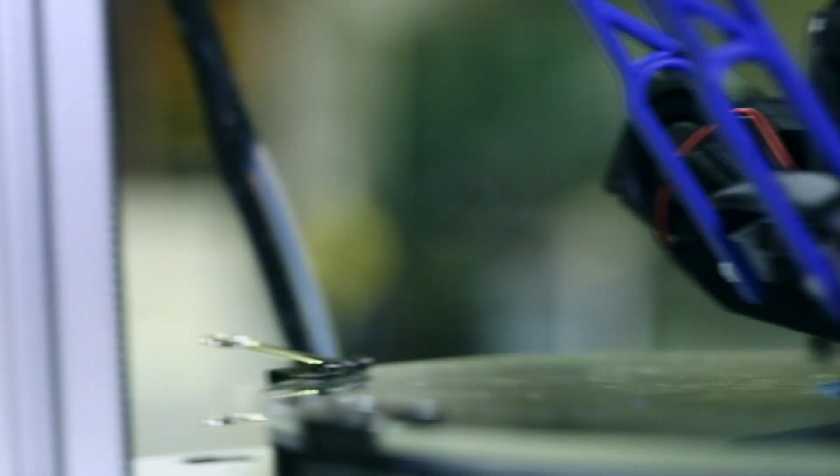How does a cross-trainer get your heart pumping and your legs burning? What allows a turnstile to let workers through but stop intruders in their tracks? How does a 3D printer create perfect replicas of the most intricate objects? To answer these mysteries, we dive deep inside these and other extraordinary machines to reveal the secrets of how things work.

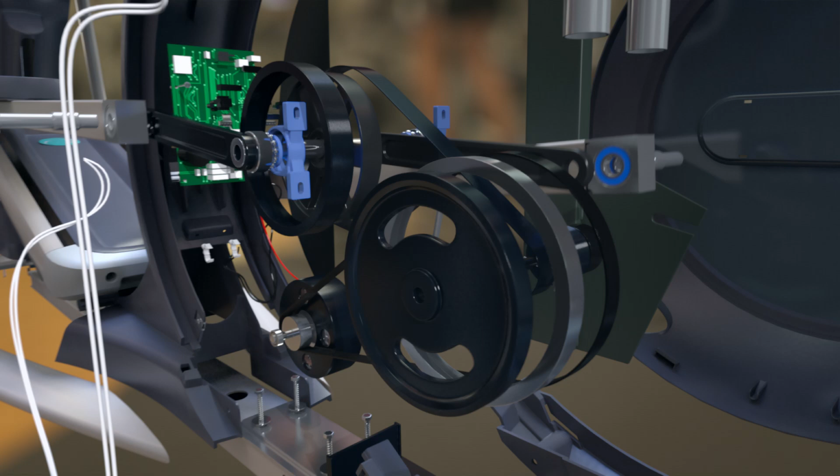The cross trainer, an essential fitness machine and staple of gyms across the world. How does this machine give us a workout like no other that gets our hearts pumping and our legs burning? It's a treadmill and bike rolled into one. Iron cranks and flywheels turn walking into cycling.

A powerful generator controls resistance and powers the machine. Perfectly balanced polyurethane wheels give a super smooth ride. On the handles, electrodes can sense the heartbeat in your sweaty palms, so you always know how hard you're working.

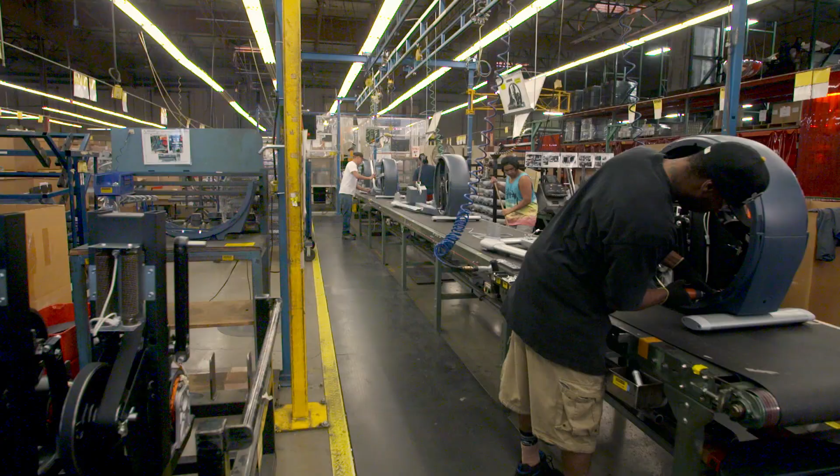The cross trainer is built to last for 60 million steps over its lifetime. The secret to its longevity is how workers assemble its steel frame in this Washington factory. Workers here designed and built the first cross trainer back in 1995. This machine does have to be pretty strong. There will be people running on this thing probably 24 hours a day sometimes.

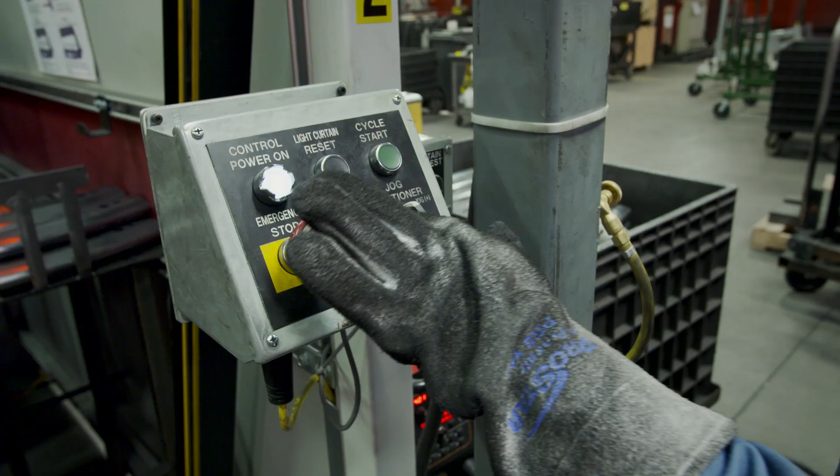Brad builds cross trainer bodies that the world's strongest man would be proud of. Here's the main structure of the whole machine. I tap on these clamps just to make sure everything's locked in position. This robot welds the entire frame in under 3 minutes. Task complete.

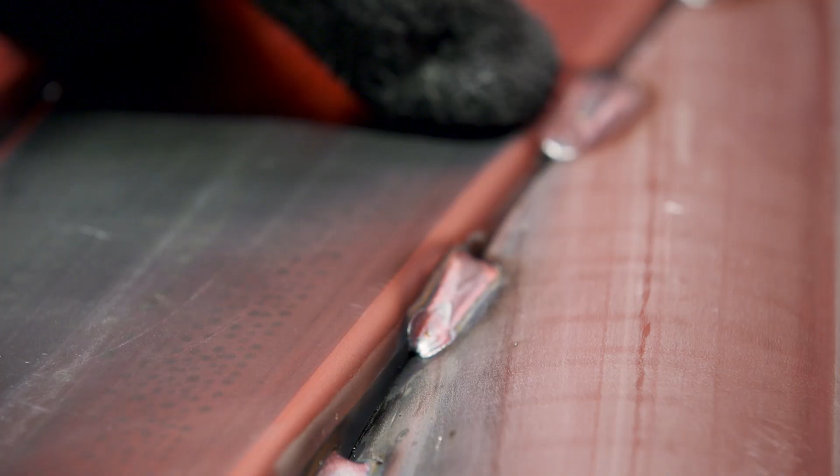Brad carefully checks the welds to make sure the frame is fit for training. The joint in the middle of the frame is the most vulnerable. This is where most of the force is applied. Instead of one continuous weld, we have separate welds. Just in case one weld does fail, there's multiple to hold it on there. With the frame complete, the team's next task is to build and attach the pedals.

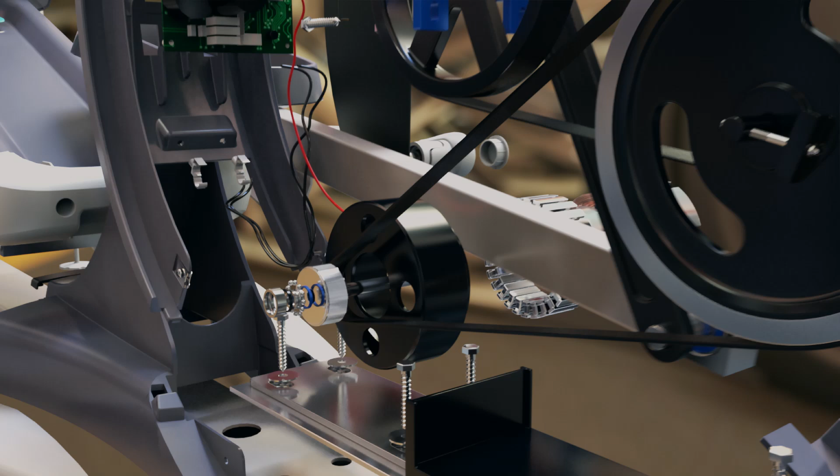Whether you're a beginner or a 100-kilo powerhouse, the pedals on a cross trainer are the key to pushing your personal best. This machine makes sure that no two workouts are the same. Every step you take revs up the cross trainer's electric power system. 2 supersized bike pedals spin 2 pulley wheels that boost the speed. They drive a generator that provides resistance. When you're at the toughest setting, you can generate enough power to run a washing machine.

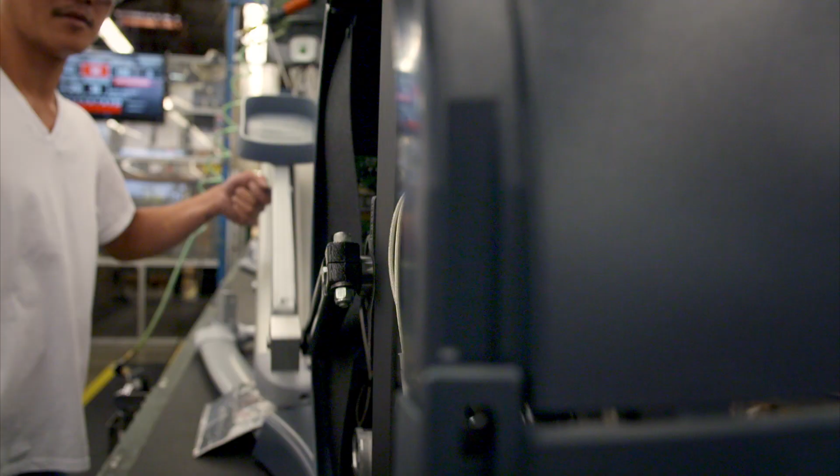The circular movement of the cross trainer pedals allows you to run without your feet ever hitting the ground. This low-impact running motion is great for your knees, but it creates a problem for the machine. The metal rod connected to the pedals, called a stair arm, must move millimeters side to side with every rotation. The movements are tiny, too small to see, but over the machine's lifetime, they are enough to destroy the bearing.

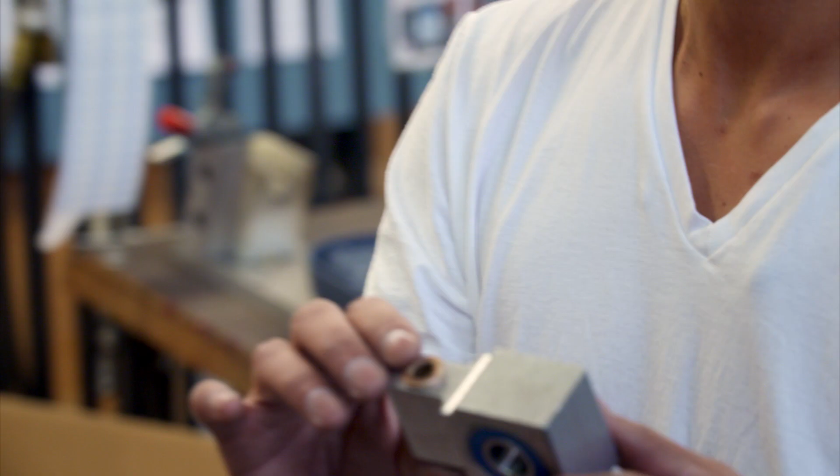Feynman engineers the solution: a flexible connection. The stair arm needs a pivot block because you need that flexibility for that smoother ride. Feynman presses a pin through the pivot block to join it to the stair arm. They still have that flexibility of moving side to side as you're riding it. With arms that will wear out long after you do, this machine can keep up with the fittest gym goer.

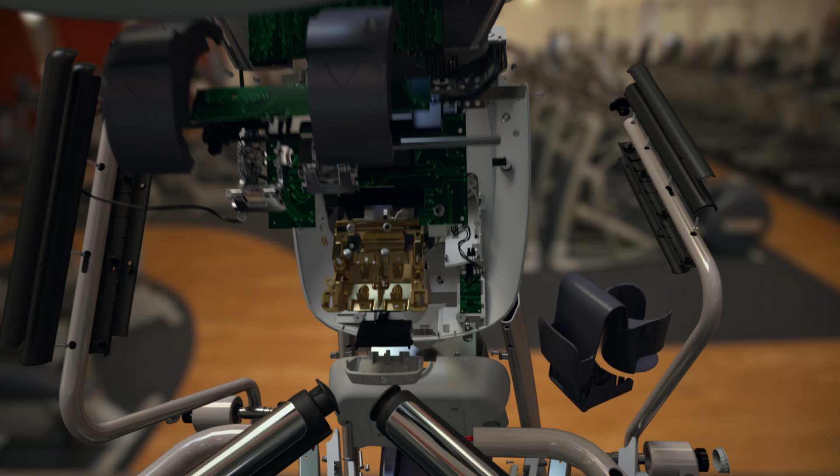To get really fit, you need to run on an incline. How does the cross trainer make you feel like you are slogging it to the top of a mountain? Right under your nose, beneath the front cover, sits a small electric motor. This drives a set of gears. The gears slowly turn a steel spiral that jacks up the trainer's ramp. The incline makes you feel like you're running up Everest.

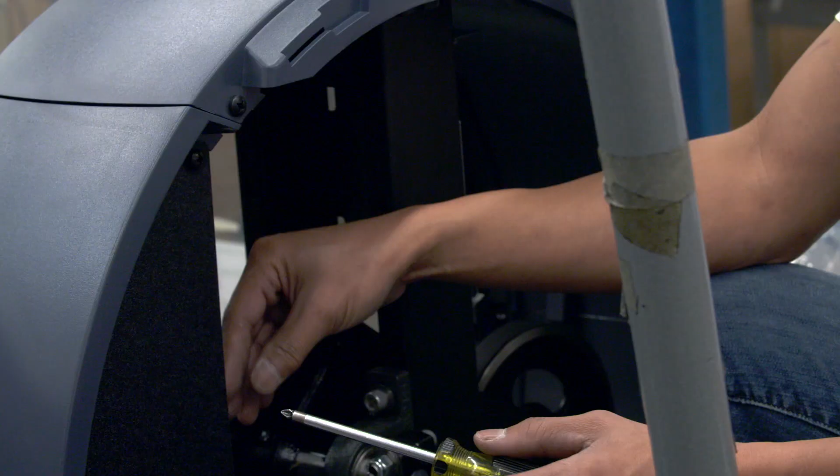For the cross trainer to deliver such a tough workout, it has to be free of dirt and grime. Any lumps and bumps in the system could ruin a good sprint. The only way to ensure a cross trainer is running smoothly is to take it for a spin. Since everything looks good and secure, I'm just gonna hop on the unit and ride it. Every machine made on the production line comes through the test booth.

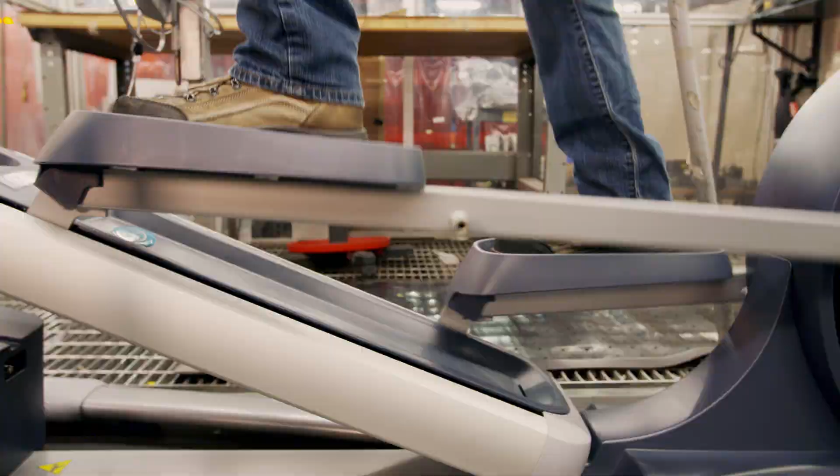I'm bringing the ramp down while I'm doing it, and then pushing the resistance up to 20. And it's pretty rough, and it's there, you know? So you can get a good feel of it. This one feels great. The ride is smooth, so now I just have to ship it out. Finely tuned by the human ear and strong enough to dish out the toughest training regimes, the cross trainer is the gym kit that won't let you rest.

The 3D printer, a micro factory that fits on your desk. This machine lays down thin layers of molten plastic, one on top of the other, to create almost any 3D object you can imagine. How does the printer control this jet of liquid plastic with microscopic accuracy?

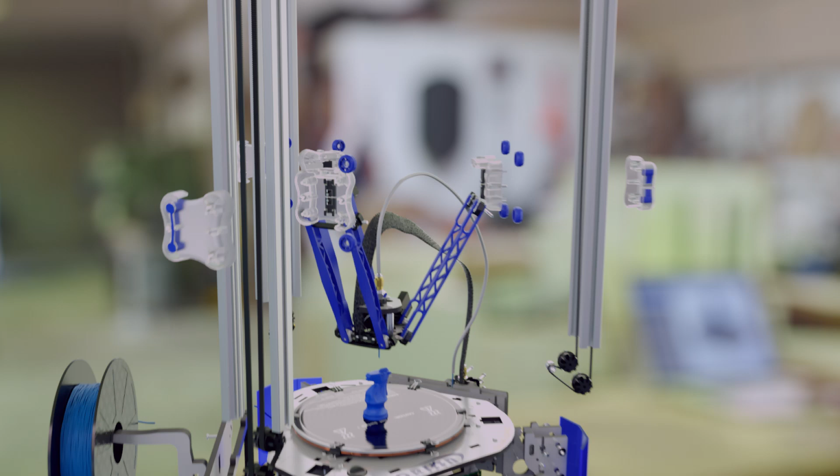Three robotic arms give the printer pinpoint precision and lightning speed. A print head squirts out melted plastic. Down below, a heated glass base holds the new product in place.

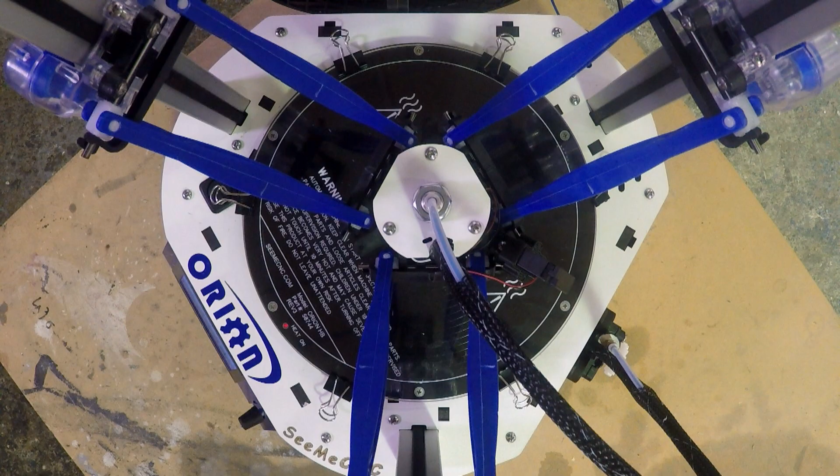Underneath, three motors drive the machine. They move in tiny steps, smaller than a hair's breadth. These elements work together to print the perfect 3D shape every time. To print successfully, the machine must turn solid plastic to liquid in less than 2 seconds.

In this Indiana factory, workers have the key to this turbocharged melting power. The electrical component that controls the flow of melted plastic is called the hot end. The hot end is the most important part of the printer. If you're not melting plastic, you can't print.

Andy puts the hot end together. The plastic comes in through the top, and then it has our melt chamber down here. What we don't want is to melt the plastic too early, which is melting anywhere above the heating block. If the plastic is melted too early, it'll expand and block up your hot end.

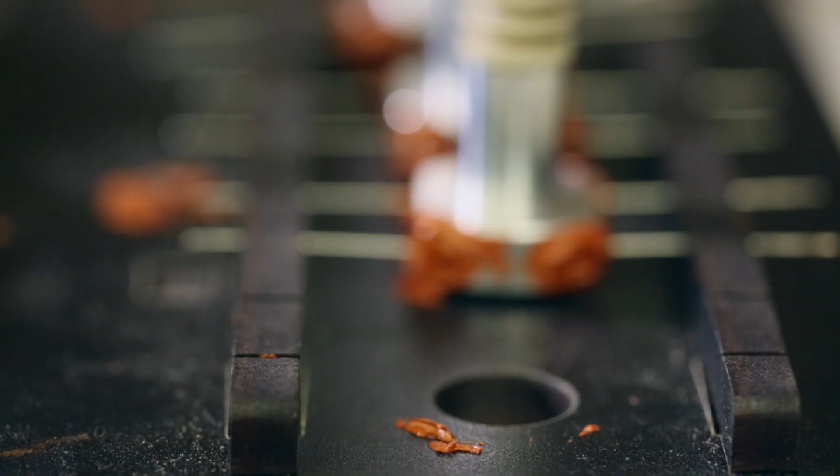Andy must assemble each hot end from 10 components. The key part is a beige thermal shield that stops the heat from spreading too far up the hot end. The middle section is a substance called PEEK. It holds high temperatures so it can withstand the heat, but it doesn't transfer that heat to the filament so it won't melt your plastic early.

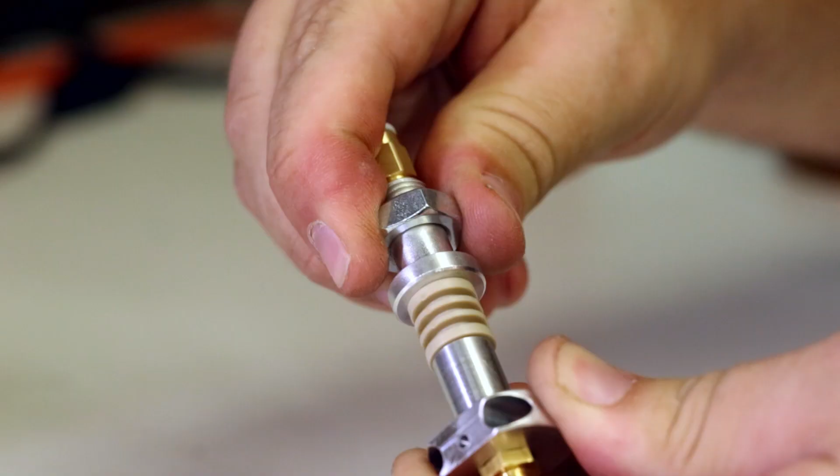Andy uses heat-resistant silicone glue to secure 2 heating elements inside. They convert electrical current to heat and get the hot end hot enough to melt the plastic.

For intricate designs, the machine can print a new object every 2 hours. To keep up this pace, the hot end needs to be fed with a continuous stream of plastic filament. This is how the machine does it. At the back of the printer, an electric motor pushes the filament up towards the print head.

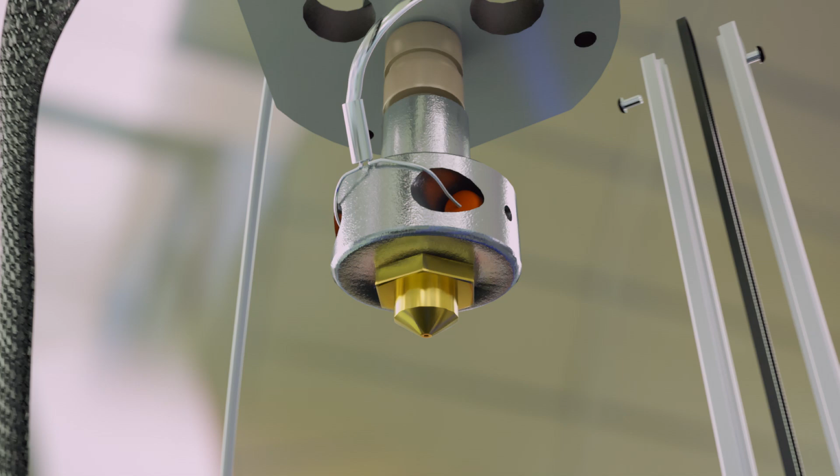Non-stick tubing ensures the plastic doesn't snag as it enters the hot end. As the plastic melts inside, it expands and shoots out as a jet thinner than a cotton thread. The robotic arms then lay this down in any shape you can dream of.

The 3 robotic arms must be exactly the same length. This is the only way the machine can position the hot end accurately enough to print intricate shapes. The key to getting the arms the right length is down to the way Mark makes them. The arms start out as little beads of plastic. From then on, it goes through the molding process.

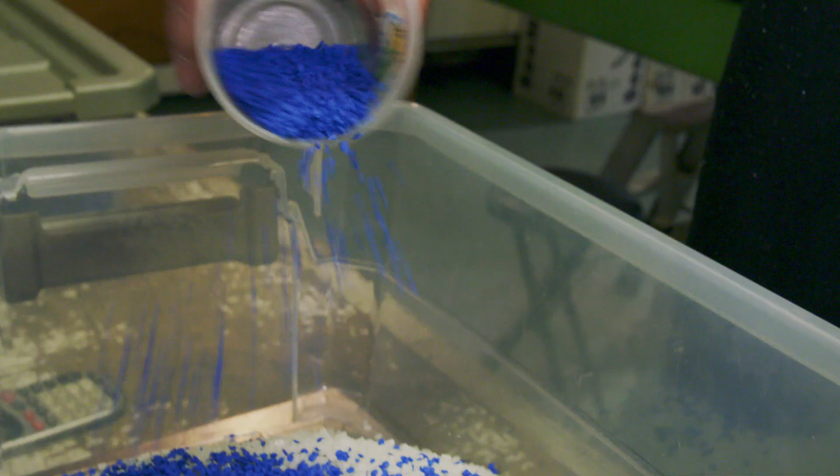Mark Fulk creates the limbs of the printer. He carefully mixes the plastic for each batch. To get an accurate print, they have to be the same dimension all the way around. That's where we use the injection molding machine to make them the same over and over and over. The finished arms need to be perfect, or Mark will have to trash hundreds of useless parts.

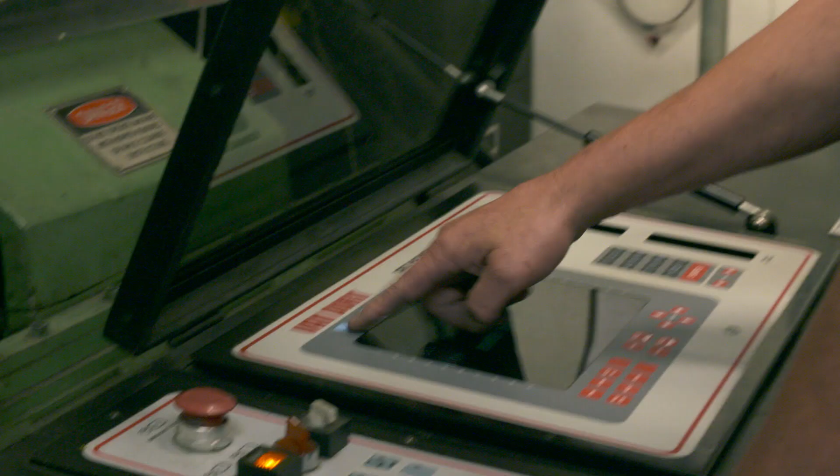When these 2 mold halves come together, it will leave a void in there, and we fill the void with plastic. The mold is made of aluminium. This soft metal is easy to cut into shape, but tough enough to withstand the scorching molten plastic. We're ready to start. Mark heats the machine to 250 degrees, hot enough to liquefy the plastic.

A hydraulic ram pressurizes the liquid and squirts it into the mold. Seconds later, it's set hard. There you go. There's the finished part. And they always come out exactly the same.

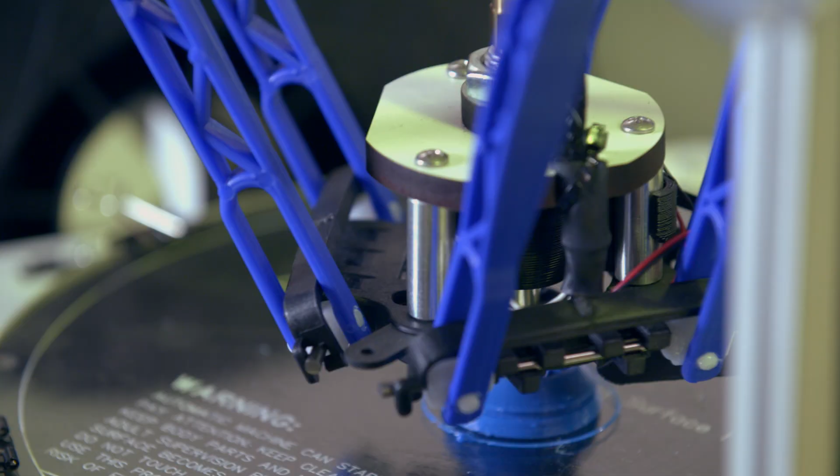The printer's arms move the hot end in steps of only a 50th of a millimeter. What gives these plastic limbs the precision of a heart surgeon? Tucked away under the glass bed, a circuit board stores the print data. It runs high-precision motors that turn in tiny steps.

The motors drive a toothed timing belt that runs through aluminium columns. The belt controls a carriage gliding on smooth rollers. The carriage moves both the arms and the hot end with microscopic accuracy.

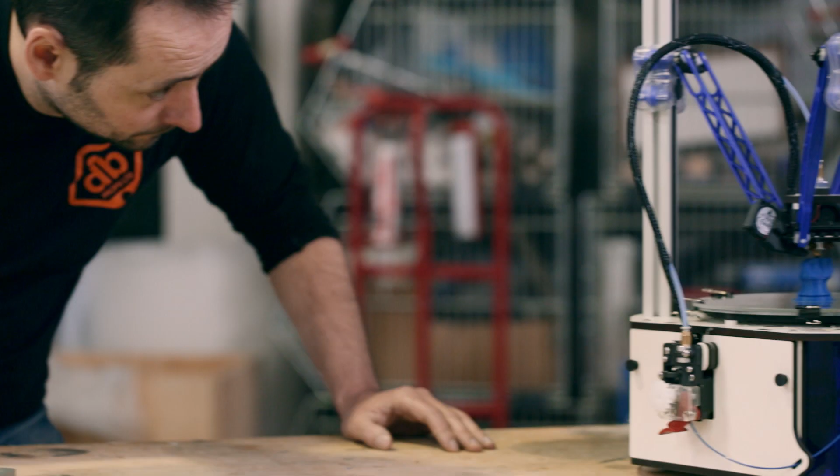Each layer laid down by the printer must sit perfectly on top of the one below. If it doesn't, the finished item will be the wrong shape. This is only possible if the object being printed doesn't slide around on the bed.

Failure is always an option when printing. If the part comes off the bed, it's going to move around and there's no recovery. You'll end up with spaghetti coming out of the nozzle. To keep the part in place, we have a heated bed. That heated bed helps keep the plastic tacky enough to stay in place on the glass and not to peel off or come loose. With the bottom of the object stuck down, the print can be made without snarl-ups.

Dexterous, fast, and even capable of making its own body parts, the 3D printer is the ultimate workshop companion.

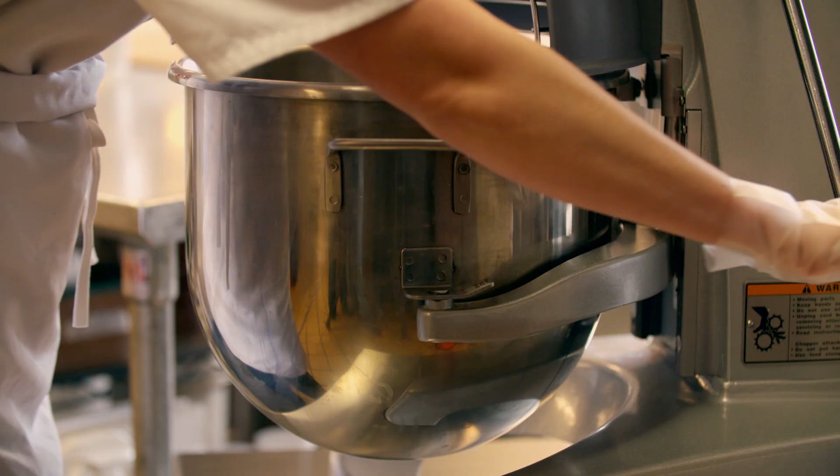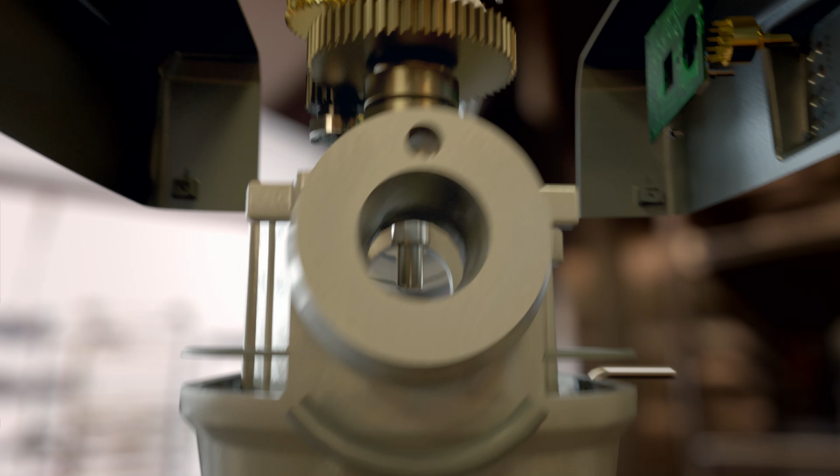The food mixer, a mechanical baker that no professional kitchen could do without. How is this machine capable of churning through a bowl full of thick dough? Beneath its skin sits a powerful motor. It can wrestle dough for hours and not burn out. A gearbox amplifies the kneading force. Down below, it has a tough aluminium mixing hook that won't bend or break. 86 kilos of metal muscle that never gets tired.

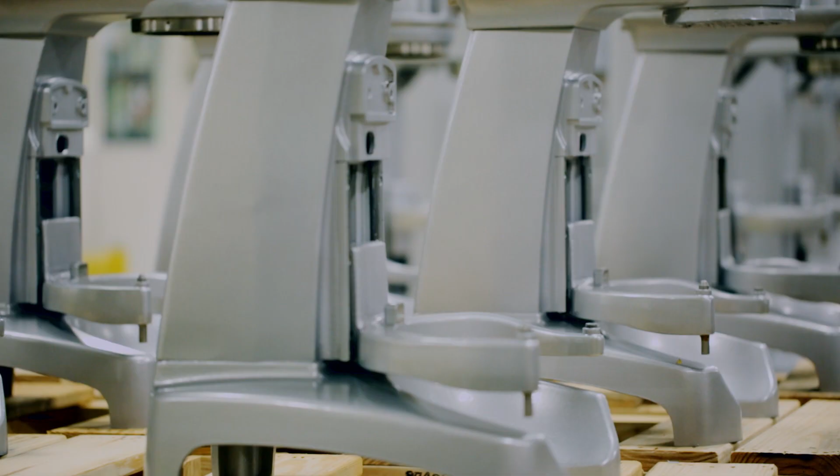Plowing through thick bread mix is the food mixer's hardest task. The way it is built in this Ohio factory is the key to how it copes when the doughing gets tough. Workers here manufactured the world's first mixer in 1914. On its own, the mixer's electric motor is not enough to tackle the thickest mix. It would be extremely hard to mix with just a motor sitting here. It takes all the gears combined together to mix the thick dough.

Brandon gears up the machine for the task. This machine has a gearbox, sort of like a car. Brandon installs 9 cogs that reduce the speed from the motor but increase its strength. He must fill the gearbox with grease to lubricate the gears, but the grease creates a problem. You need the grease to stay in the gearbox and not down in your food.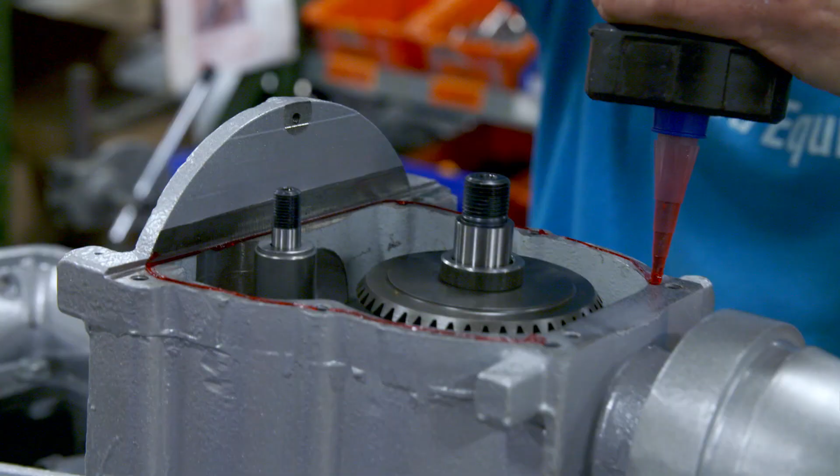Brandon bolts down this top plate to seal the gearbox. He must tighten the bolts carefully or the gears could be ruined. If you don't put the bolts in properly, it could cause this whole top plate to be lopsided, which can break the teeth on the individual gears. After the top cover is locked down, I turn this to make sure none of the gears are binding and everything moves freely. It looks good.

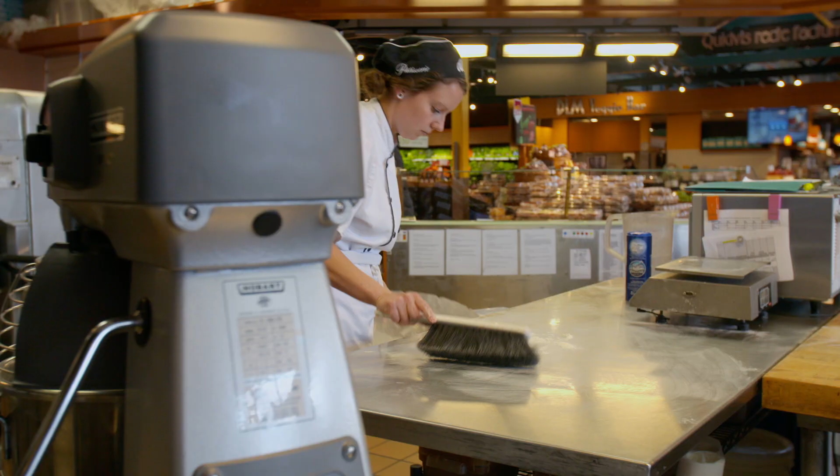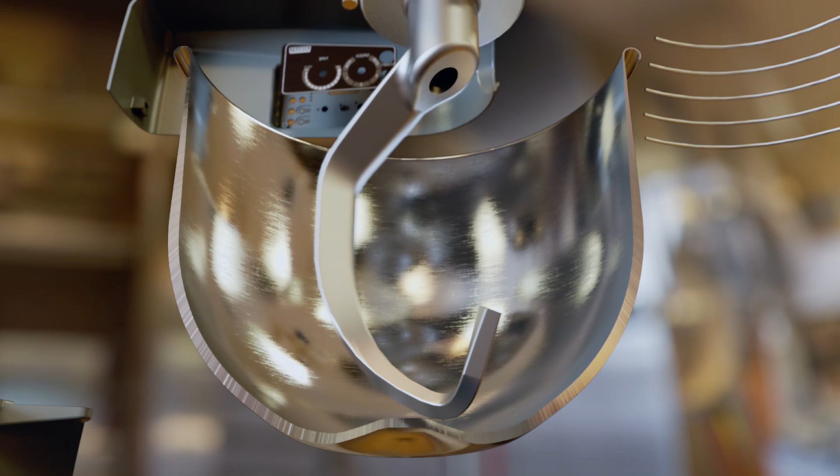For a good bake, it's critical to get an even mix of ingredients. Just stirring the mixture from the center won't blend everything properly. But how does the machine make sure no piece of dough gets left behind? Under the mixer's hood, a half-horsepower electric motor rapidly spins a drive shaft. The gears slow the revs but crank up the force. Under the gearbox, a small cog spins as it moves around the inside of a larger gear wheel. The gear wheel turns the hook, which scrapes the dough from the edge of the bowl and pounds it in the middle.

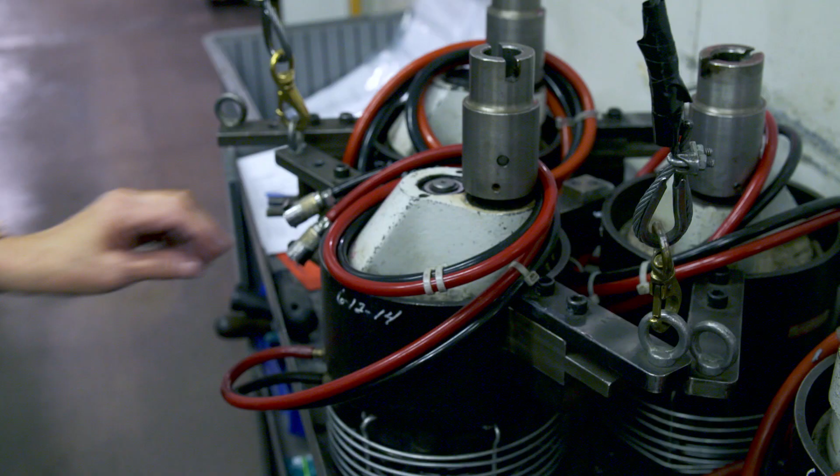Before it leaves the factory, the team must test mix a batch of dough. Teresa is the testing lab's head baker. She uses a robotic dough mix known as a brake instead of flour and water. This is a brake, and it simulates me using a bowl with a beater to mix up some dough. The brake fits directly onto the machine's rotor. It uses air brakes to mimic the force required to mix a bowl full of ingredients. This test lets me know that this mixer is capable of the customer being able to use it and mix dough.

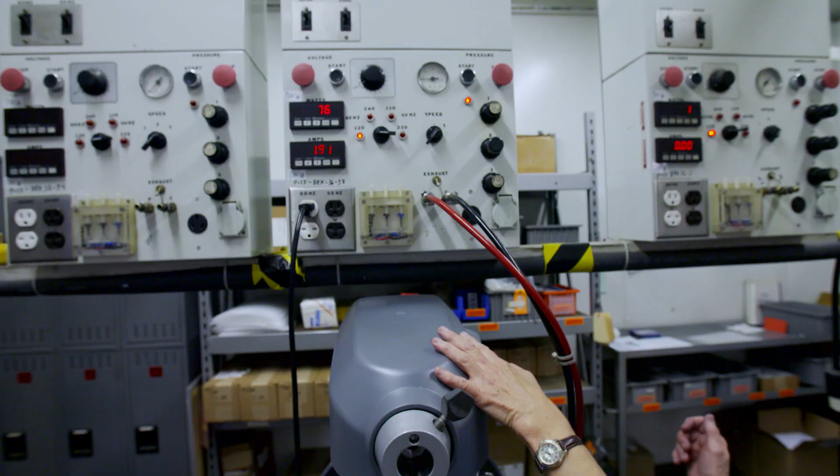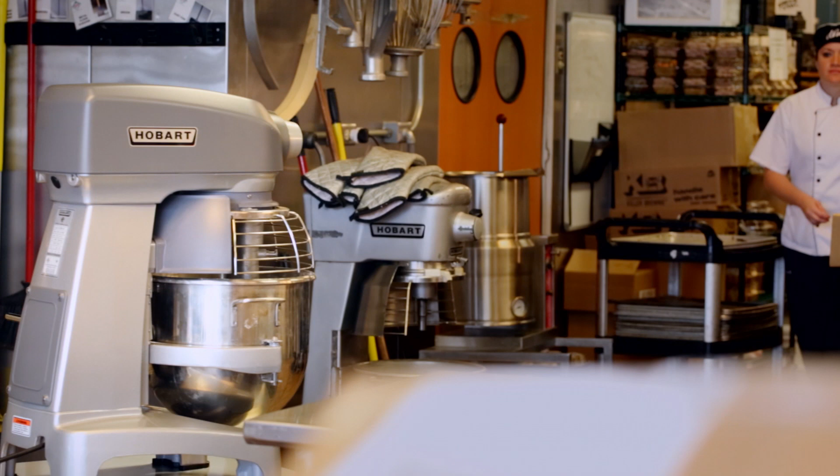Teresa's ears are finely tuned to the sound of anything out of the ordinary. If there is a burr on your gear, you're going to hear it thumping. Or the speed, sometimes the speeds will jump. This one sounds good and is ready to be cleaned and shipped to a customer. This mixer is finally ready to start its life as the workhorse of the kitchen. Without a food mixer, making bread is more work than play. Thanks to this ingenious invention, you can take the backache out of baking.

The frozen yogurt machine, dispensing delicious chilled treats. How does it convert liters of liquid yogurt into fresh, fluffy, frozen dessert?

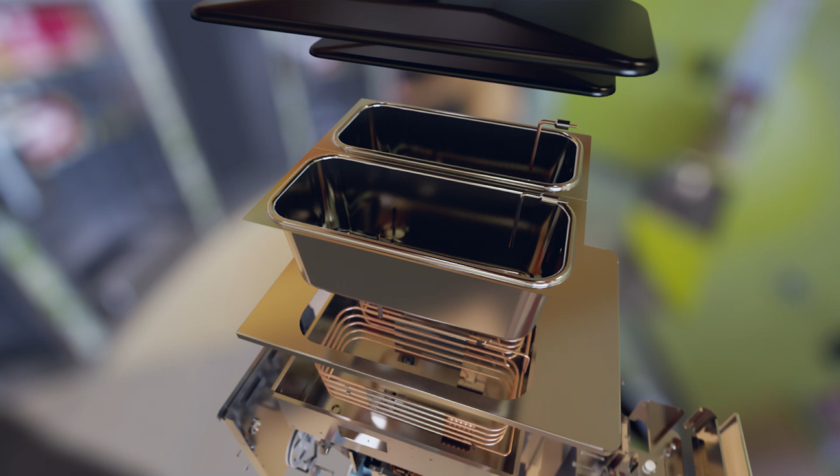Stainless steel tanks hold 230 portions of yogurt. It flows out of the bottom through a valve that injects air to make it light and fluffy. Seamless steel cylinders freeze the yogurt in just 8 minutes. A churning blade keeps the product soft and creamy. And at the front, a mixing tap adds a little twist.

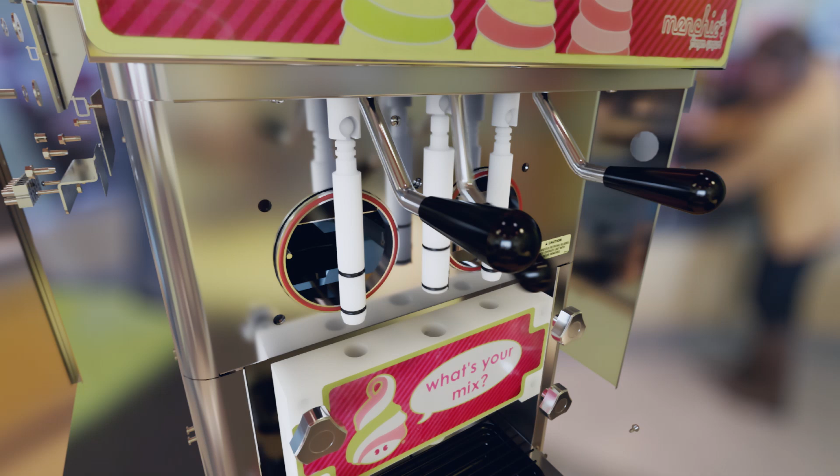The freezing cylinders hidden inside must be hygienic and bacteria-free to make sure that the machine dispenses dessert that tastes fresh. But how do you keep something clean when it's constantly covered in frozen yogurt? The key to this lies in how workers make the cylinders in this Wisconsin factory. This company helped invent the first frozen dessert dispenser in 1939.

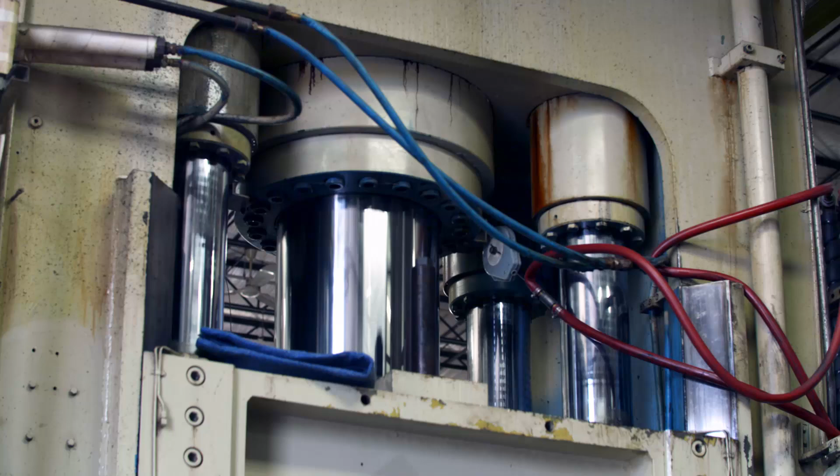Workers make the cylinders out of a single flat disc of metal with no joins or seams to make sure they're easy to clean. We want to end up with that right there. What I'm holding here is the finished tube, which is used in the yogurt machine. And it's nice and smooth. Bruce must create a cylinder that is flawless.

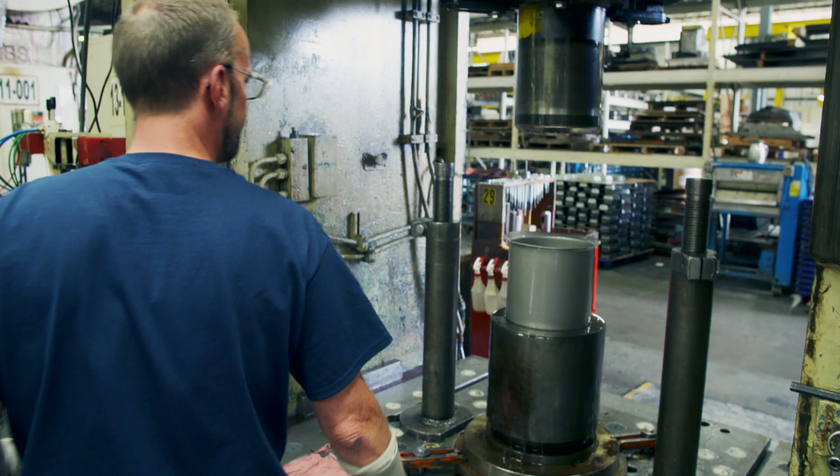He uses a hydraulic press to apply the equivalent weight of a grizzly bear to force the flat sheet into a cylindrical shape. But he can only go so far. To make a long, thin cylinder in one go is impossible. The metal would crack and split. So it has to be done in 5 stages.

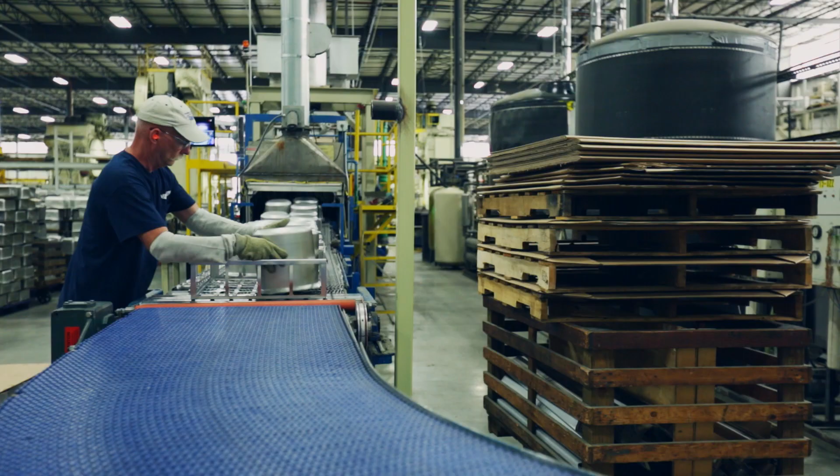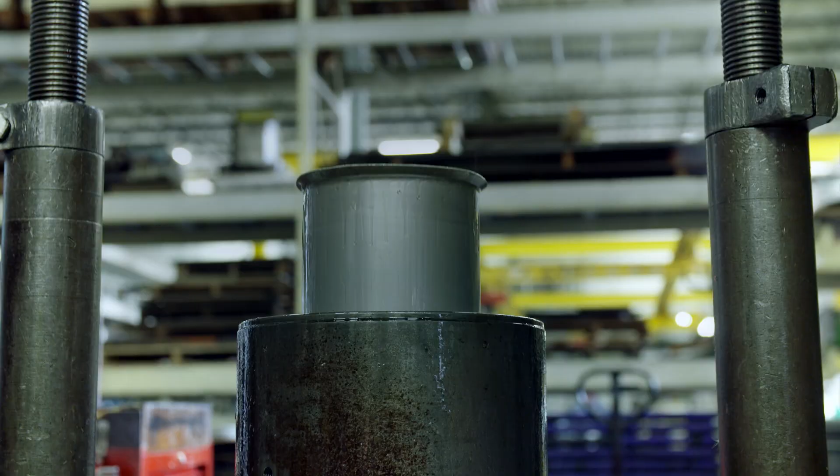Before each stage, Bruce must heat treat the metal to give it maximum flexibility. He puts the cylinders through a huge conveyor oven. It heats them to the temperature of lava and then rapidly cools them. Bruce can now press them again. Each press squeezes them longer and thinner. Five presses later, the cylinders are finished. But that's not the end of their story.

In the completed machine, the cylinders get so cold that the yogurt inside them could easily turn to a hard block of ice. Not good for the customer who wants fluffy and light froyo ready at the pull of a lever. This is how the machine keeps the yogurt frozen but flowing.

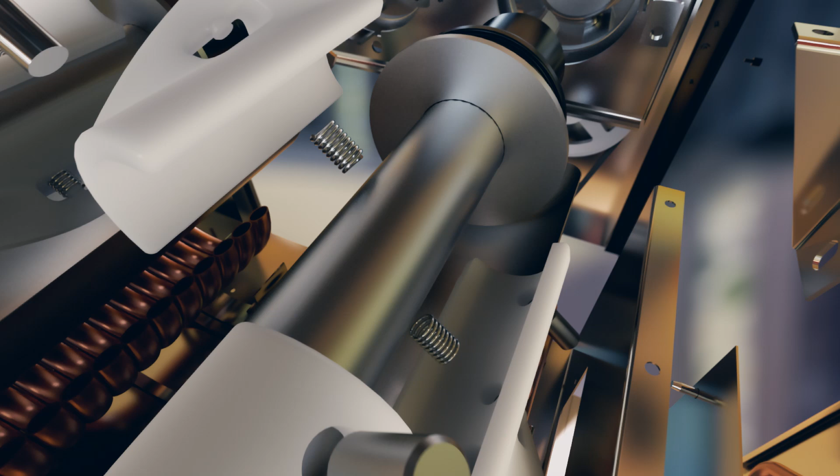Copper pipe full of coolant wraps around the cylinders. Inside them runs a shaft with 4 curved paddles that churn through the freezing mass. Powerful springs push the paddles outwards. They scrape the freezing yogurt off the cylinder before it sets hard, keeping it moving and ready to serve. It takes an intricate cooling system to get the temperature below freezing.

After the cylinders have been pressed, workers coat them in resin. This makes sure that the copper pipes stick to them tightly. These pipes are the arteries of the machine. They channel the refrigerant, a freezing fluid that chills the yogurt down. Jennifer's job is to bring this machine to life. Connecting the refrigeration lines is the most critical part of the job. Making sure that there are no refrigerant leaks is key to a successful frozen yogurt machine.

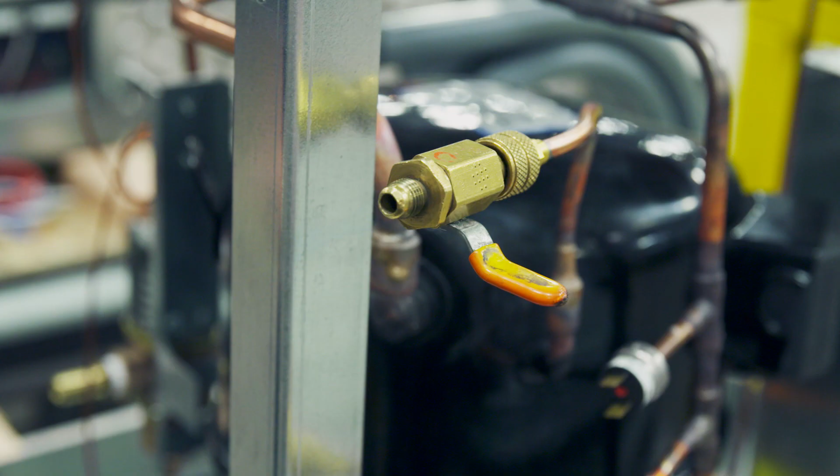Jennifer fills the machine with a safe gas, helium, before she adds the refrigerant. This helps her check the quality of the joins. We double and triple check our work here to make sure that there are no possible refrigeration leaks. She uses a highly sensitive helium detector to sniff out any escaping gas. The test's going great. We haven't heard a single peep, so there are absolutely no leaks.

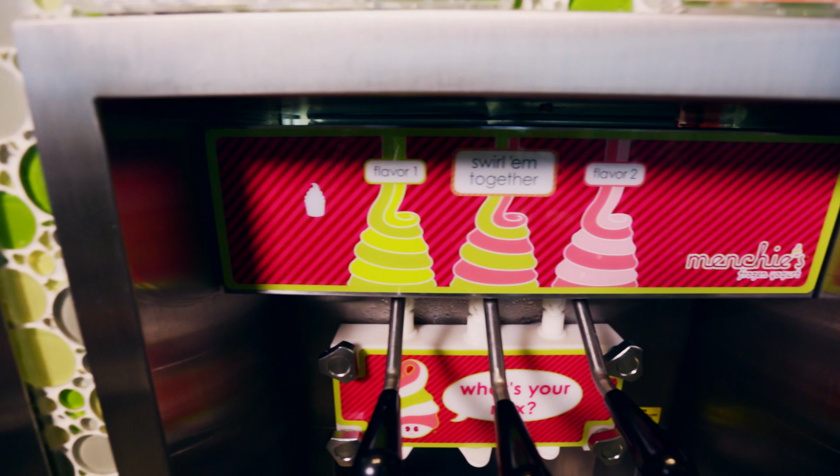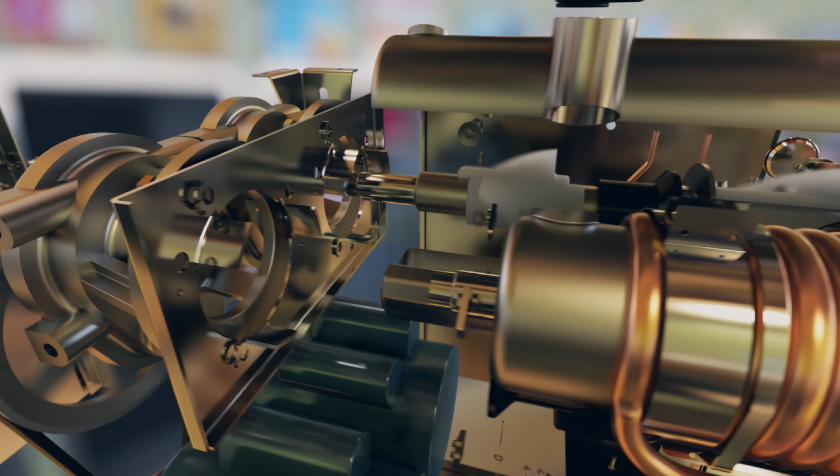The cooling system can turn liquid yogurt to frozen dessert in less than 10 minutes. But as the yogurt starts to freeze, it gets thicker and harder to serve. So what stops this machine from grinding to a halt? As the mixture freezes in the cylinder, it starts to slow down the paddle. But the machine has an onboard computer that can sense the tiniest change in speed. The computer shuts off the refrigeration and stops the yogurt freezing, allowing the motors to get back up to normal speed. This keeps the froyo at just the right consistency.

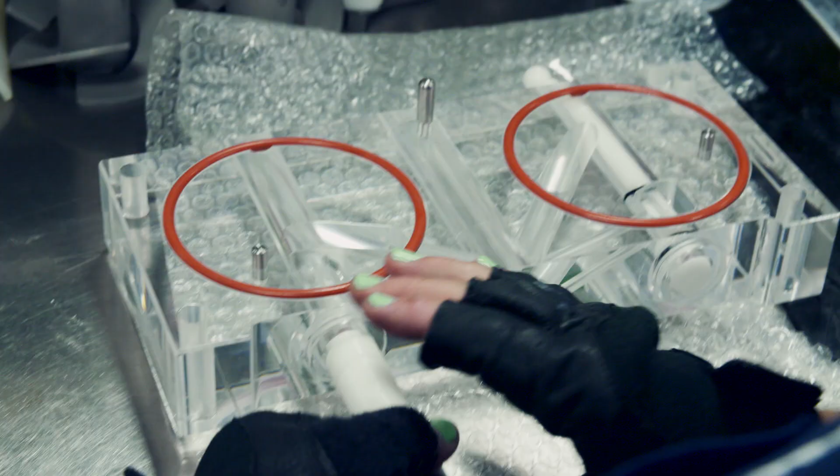Even on a busy day, there will be gaps between customers, and this creates another problem. Any froyo stuck in the nozzle will slowly start to melt. This will give the next customer a sloppy serving. As soon as the frozen yogurt leaves the machine, it starts melting. Kelly makes sure that only completely frozen yogurt greets the customer. She assembles plastic stoppers into a door and fits them directly to the front of the machine. The stoppers hold back the yogurt until the customer pulls the handle.

When the serving is complete, the stopper or spigot drops back down. It cuts off the flow and pushes out all of the remaining yogurt. When the customer releases the handle, the spigot will push all of the product through the door, and there will be no melted product sitting in the door. No matter how long the machine waits between customers, it's always ready with the freshest froyo. The frozen yogurt maker, a turbocharged freezing machine standing by to refresh the hottest customer.

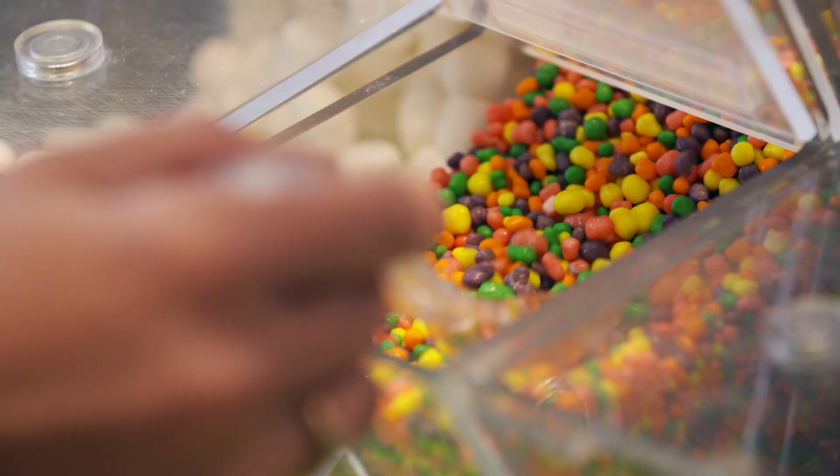The turnstile, a mechanical sentry that never gets tired and never makes a mistake. How does it stop unwanted visitors in their tracks, but allow guests and employees through? 33 highly polished steel arms block the way. Inside a weatherproof box, a digital brain knows who's allowed in.

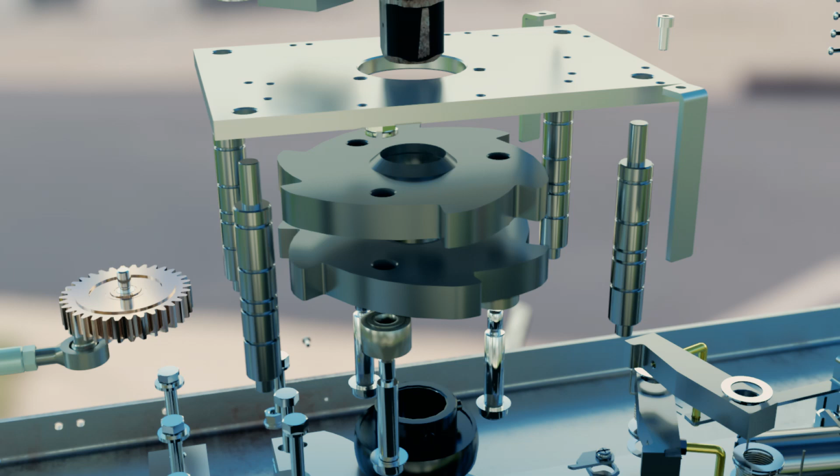Magnetic motors control the gate. Located under a massive drive wheel, mighty steel ratchets stop illegal entry. And a hydraulic shock absorber soaks up the bumps to give this metal bouncer a gentle touch.

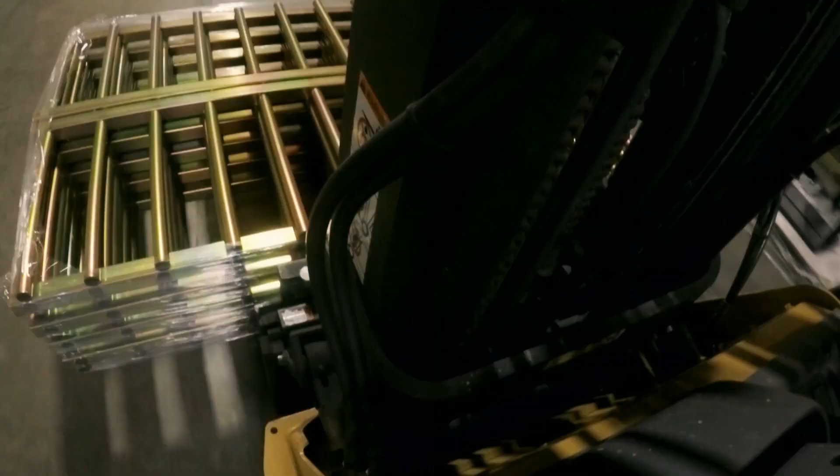Engineering the turnstile is a challenge. How do you make it light enough to push round, yet strong enough to keep intruders out? The secret lies in how workers construct the gate at this North Carolina factory. It's crucial that they select the right materials. 316 steel is one of the best stainless steels you can use on a turnstile. It's very lightweight and it's weatherproof. Rain, snow, sleet, it doesn't matter, it still comes out with a perfect finish.

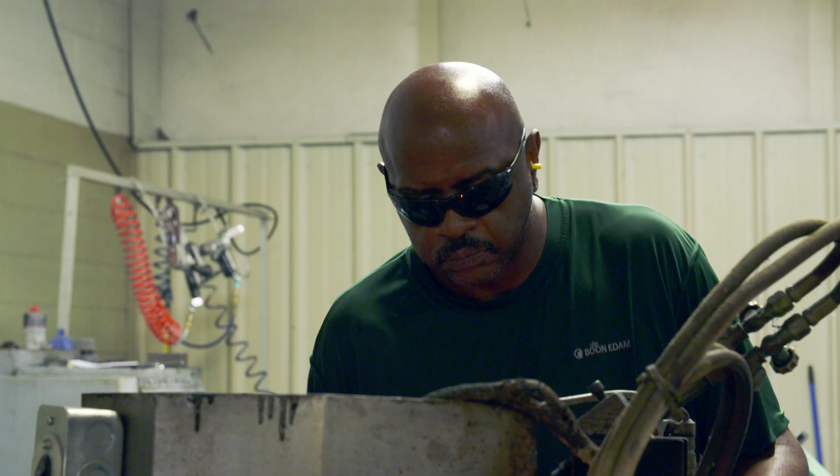Mike makes the arms for the turnstile gate. He cuts each arm to length. But this leaves the metal jagged and sharp, painful for anyone brushing up against it. The solution? He melts the pipe to seal it with a smooth, round finish. I heat it up till it's real hot, then I form the end. The blowtorch shoots out flammable gas and high-pressure oxygen to create a flame 20 times hotter than your kitchen oven.

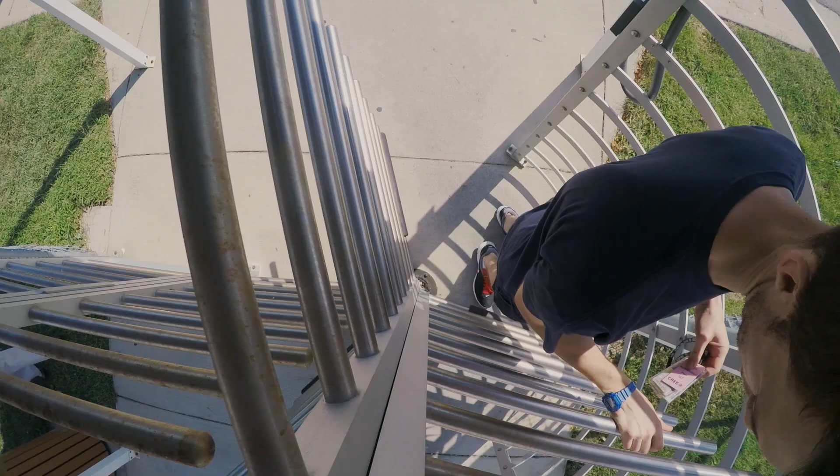The end result is an arm with no sharp edges and no weak spots. Tougher than my car, tougher than nails. Solid, but at the same time lightweight. Very lightweight. Once cooled, Mike polishes the arms to provide the perfect finish. The arms stand firm in the path of trespassers. But how does the turnstile transform them from impassable barrier to open door at the swipe of a card?

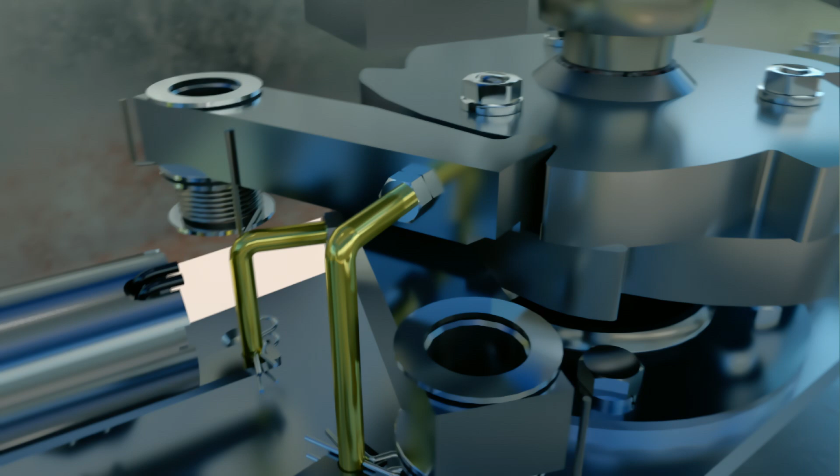At the top, two thick steel ratchets block unwanted visitors. When access is granted, a magnetic motor pulls back the locking bar to open the gate. Every entry trips a contact switch. This makes the magnetic motors drop the bar back in to relock the gate.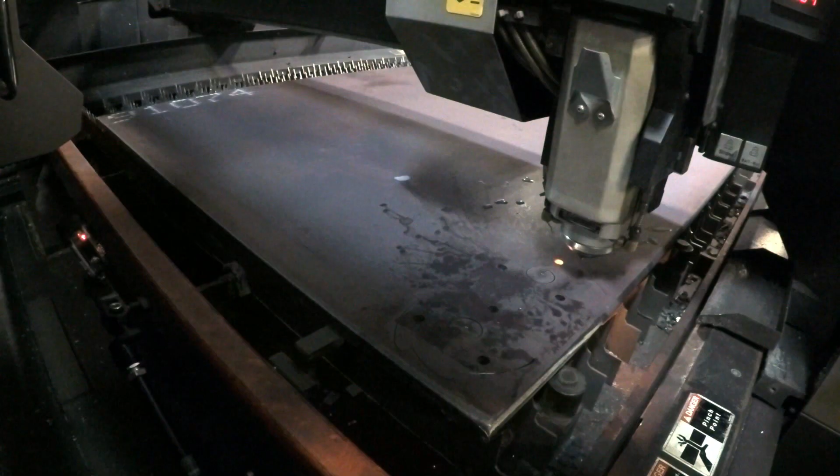Laser operator Kenneth harnesses the power of this 4,000-watt cutting tool. The laser focuses a beam of infrared light onto a single point the width of a grain of sand. The metal under this point melts instantly. High-pressure gas blasts it away. It cuts exactly what we want every time. The ratchets are ready to guard the turnstile.

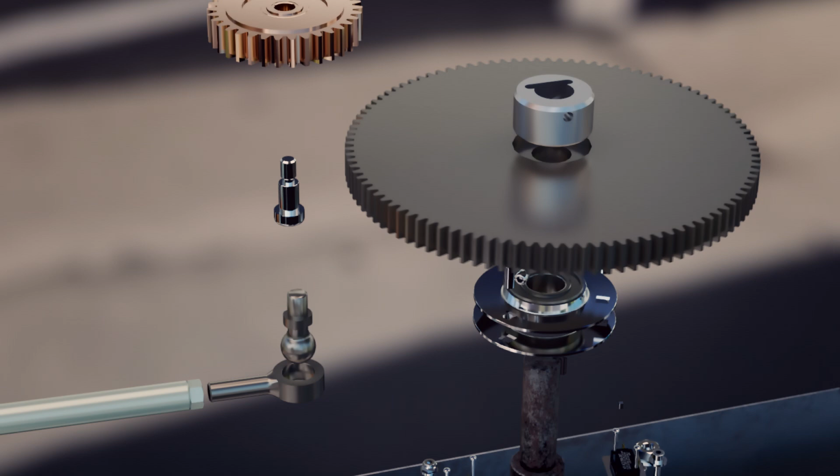The correct access unlocks the ratchets and a push gets the gate spinning. 100 kilos of metal are now on the move. If they spin too fast and hit you, it's going to hurt. How does the turnstile keep you safe as you rotate through this heavyweight stack of steel? The revolving gates turn a gear the size of a dinner plate. This drives a smaller cog which pushes on the arm of a shock absorber. Inside it, oil squeezes past steel balls to slow down the revolving gate. This way, when you give the gate a shove, it doesn't hit back.

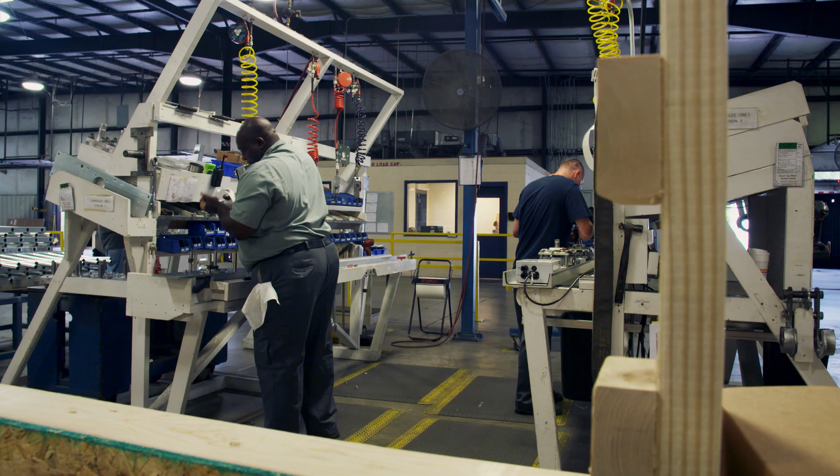The turnstile's onboard computer knows when to grant access and when to hold firm. But what if the electricity fails? Could a power cut trap people inside? Well, in an emergency situation, obviously you want people to leave. Travis makes sure the turnstile won't block people who need to exit in a hurry. The solution is a simple spring. The spring fits onto the exit ratchet lever. With the power on, the system holds the lever closed and keeps the exit locked.

But if the power fails, the system releases the lever and the spring flips it open to allow people through. Power to the building, cannot leave unless you card out. Power cut, you can leave. So it functions correctly. This ingenious mechanism gives the gate a fail-safe, so no one gets stuck. This one's perfect. Perfect working unit. Ready to go.

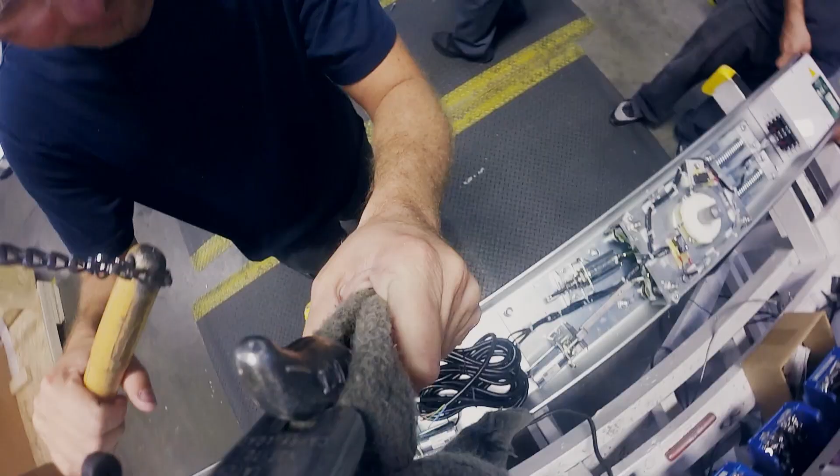Always on guard, whatever the weather, it doesn't take breaks and never sleeps. The turnstile, it is the ultimate doorman.

The ubiquitous office chair. We sit on one of these for up to 8 hours a day. A badly designed seat can lead to hours of misery. So how does this machine keep the world's workforce comfortable? 100 parts work together to keep you comfy.

At the back is a spine made of glass-filled nylon. Underneath, plastic leaf springs give a smooth and balanced recline. A pressurized gas spring allows flexible height adjustment. At the base, wheels that lock the chair in place when you get up. And a seat that can take the weight of a baby elephant for 100,000 hours.

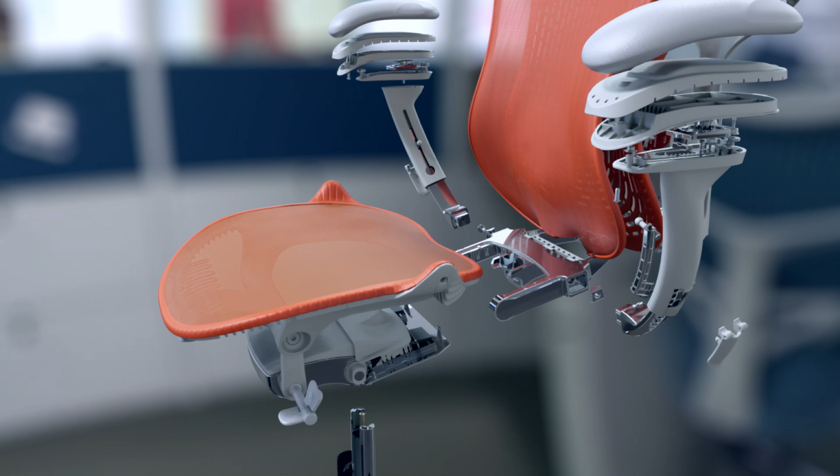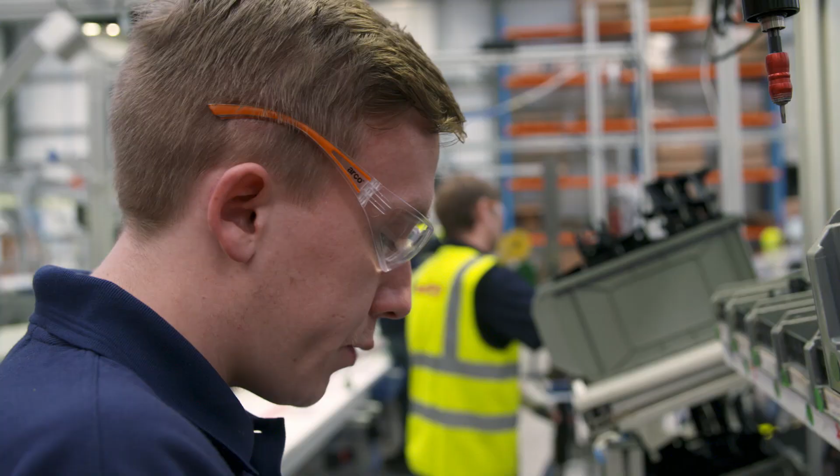For this chair to keep our backs in good health, it must support them from bottom to top. But this isn't easy when we're constantly shifting in our seats. The team at this factory in Wiltshire knows the secret to building a chair that offers total support to our spines. A perfect chair will flex with you as you move. The chair's unique tilt mechanism is the key to this seat's flexibility.

Josh starts each chair assembling this system by hand. The tilt mechanism is the heart of the chair because it holds all the controls. Without the controls, there would be no adjustment. And you need a chair that's fully adjustable, so it's suitable for all people. 18 components make up the chair's tilt mechanism. 2 are absolutely crucial to a healthy back.

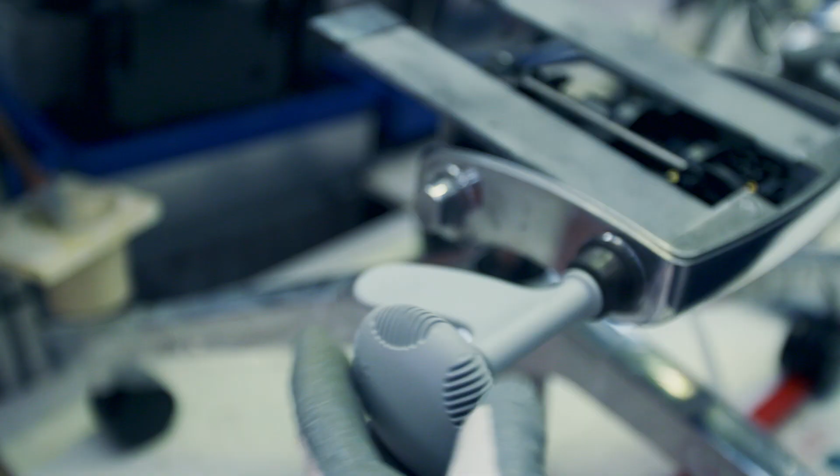These bits are the leaf springs, which allow the back of the chair to flex with the desired movement of the person. The springs hold the backrest against our spine and let it move as we move. Because this allows the chair to flex, it will mean that the person will always be supported on the back of the chair. This central mechanism forms the heart of the chair.

But a chair will still be uncomfortable if it isn't at the right level for the length of your legs. How does the office chair allow each of us to adjust the seat to the perfect height? The secret is the gas lift. It's a cylinder full of nitrogen at 30 times the pressure of a car tire.

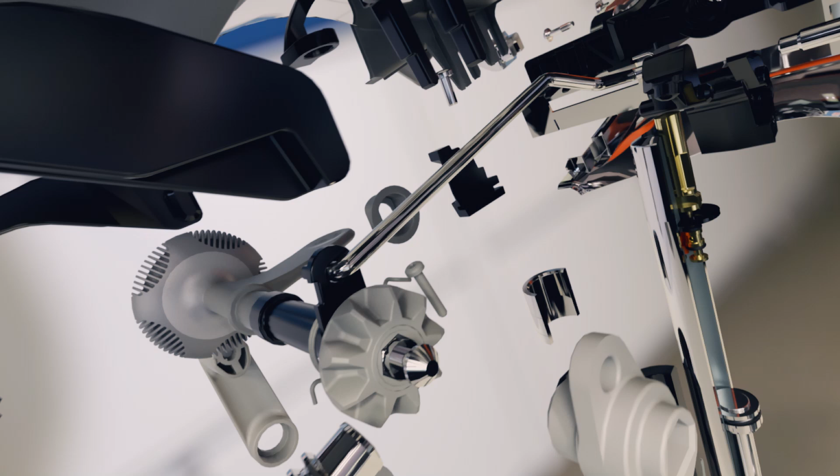A lever under the seat pushes a button on the gas lift. This opens a valve that allows the gas to flow out of the cylinder. So you can either drop the seat or use the pressure inside to raise it. It is both shock absorber and elevator.

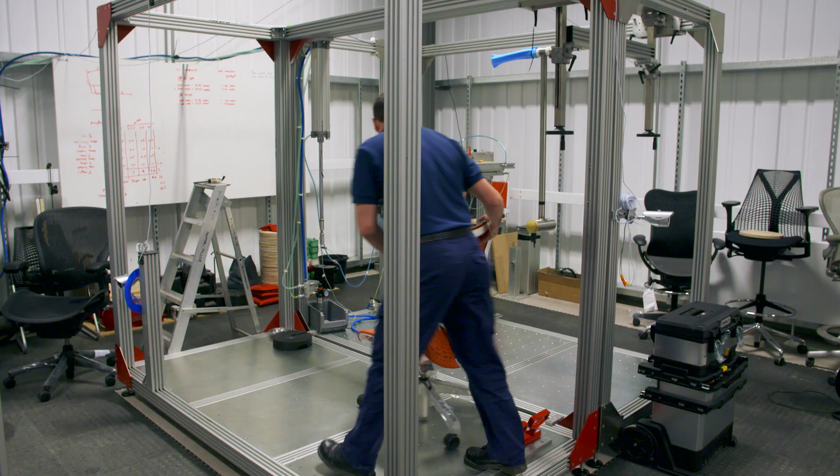Office chairs take a beating over their lifetime. Once built, Chris Owen tests the chairs to ensure they can withstand years of being squashed underneath us. This chair is designed to last for 12 years, continuous use. I'm loading the chair with a representative weight. So this is a 102 kilogram person sitting on the chair. It's just the start of what Chris has in store for this poor seat.

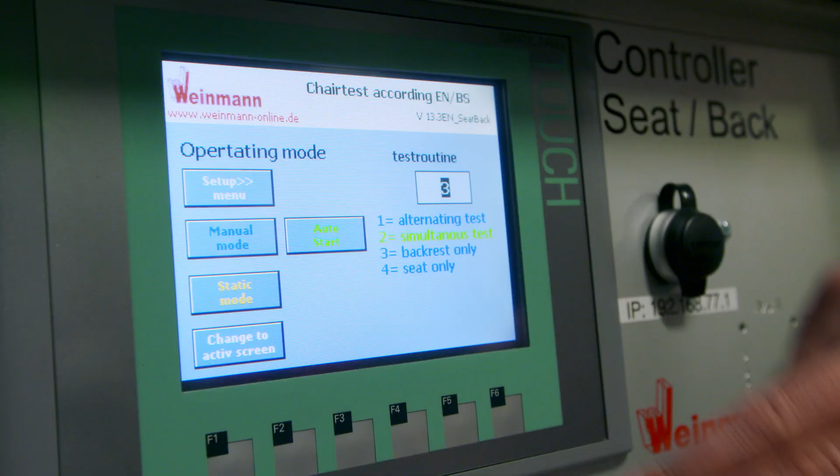This is a pneumatic ram, and so I can adjust the amount of force that's exerted on the chair by the pad. This test is designed to simulate somebody leaning back hard on the chair 10 times an hour, 24 hours a day, 365 days a year for 12 years. The test will run day and night for 6 weeks.

If something does happen overnight or over the weekend, then I can just come back, check the footage on the cameras and see exactly when it went wrong and what happened, the mode of failure. This chair is designed to offer complete back support and built to withstand non-stop use. The average office worker will spend more than 2.5 months each year sitting at their desk. That's a lot of uncomfortable shifts without the supporting embrace of the perfectly designed office chair.

The cross trainer, the mighty food mixer, the frozen yogurt maker, and the turnstile. What's inside isn't always big, but it is clever. Next time you see one of these machines, remember, there's more to how things work than meets the eye.